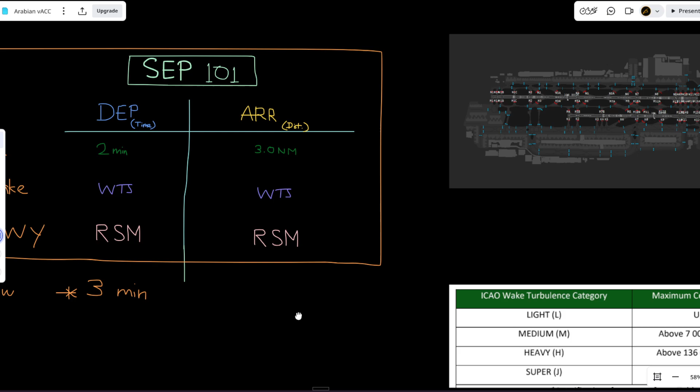And as I said, this applies universally across all airports in the Arabian VACC, with the exception of this little thing right here, which is unique to Dubai. But hey, speaking of Dubai, that's kind of a segue here, because as it turns out, Dubai is special, very special, and what we see here is actually not what we apply into Dubai, because what are we trying to do at Dubai? So I'm just going to get rid of this flow separation thing, by the way.

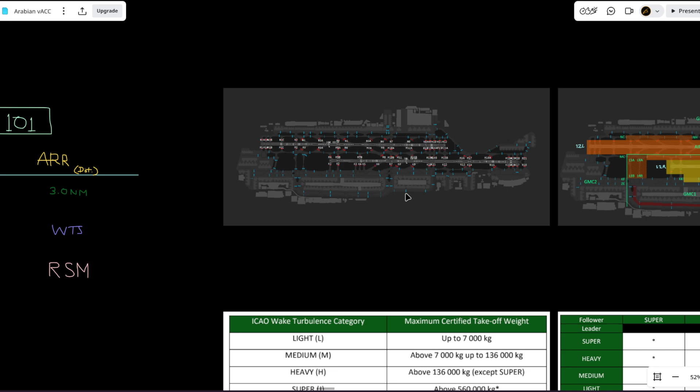Dubai is a very busy and populous airport, very populated. Given how much activity it sees and how little room we have to maneuver, we only have one runway for departures and one for arrivals, and even so, they're both pretty closely spaced together, as you can see.

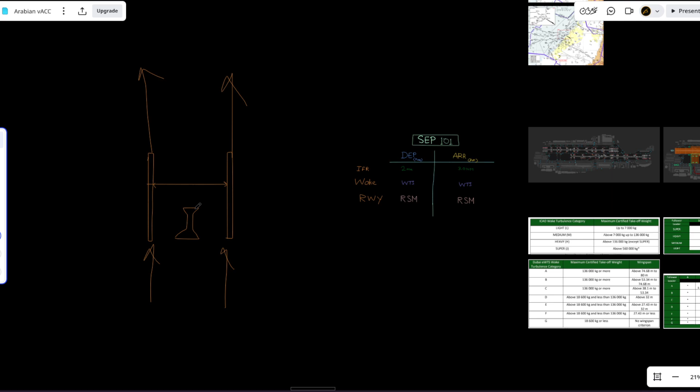Unlike airports such as, if you think about over on the west, we've got Qatar, Doha, with two huge runways and a massive terminal. Don't question my drawing skills here, but let's say this is a terminal, just pretend. And these runways are really spaced out by quite a bit, so you can have simultaneous departures, simultaneous arrivals, just to keep it simple. In reality, obviously you have restrictions on what you're allowed to do with simultaneous operations, or the way you mix operations, but a big airport like that, you have a lot of room to play with.

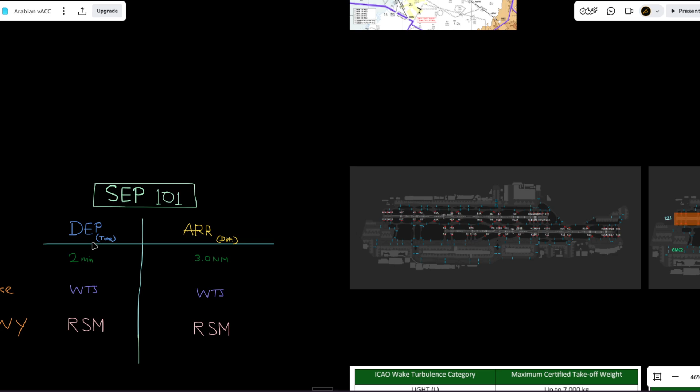Dubai, though, not so much. Which, if you pair this with the fact that we have to accommodate a very large volume of traffic, we have to be as efficient as we can. We have to make as much use of what we have. We have to maximize what we have. And that also means

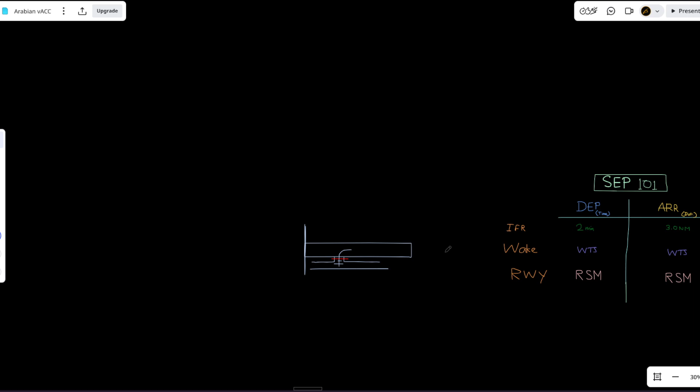putting a question mark on all of this. Do we really need to apply, for example, runway separation minimums? I talked about this, right? So if I just bring this back - do we really need to wait until they pass the stop bar, for example? Do we really need to wait until they're completely clear of the opposite threshold? Can't we give landing clearances or takeoff clearances any sooner based off of some criteria that we could prescribe ourselves?

What about wake? We get it, generally speaking, a bigger plane equates to just having a maximum, so rather go at it the other way - if you want to carry more passengers, you want a bigger plane that can have a higher takeoff weight,

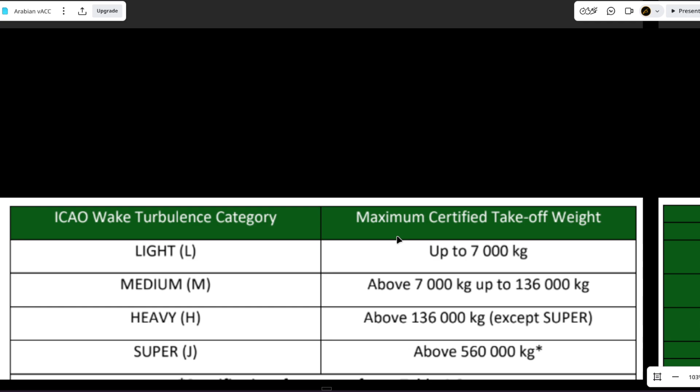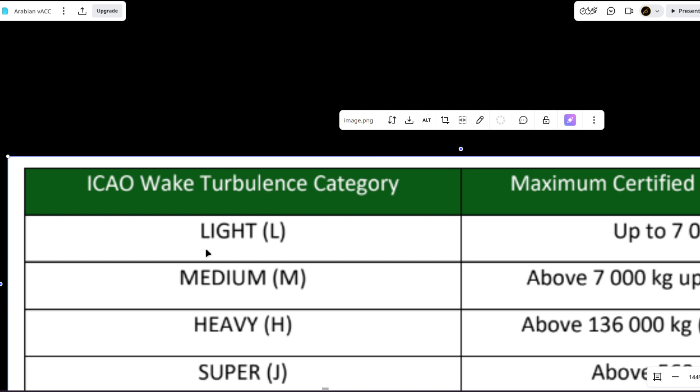and that makes the overall plane bigger, so to speak. So you're thinking in terms of weight, but is weight the only real way to measure an airplane? Because I haven't even mentioned size. I mean, yeah, we have the names, but it's really not a size - it's just a classification which is based in and of itself off of weight. We're not really measuring the size of aircraft. Would that probably be a factor?

In today's video, we're going to tackle all of those questions. Let's start with wake. So if we go back to what we said there,

generally speaking, the bigger planes produce bigger wake turbulence. But at the end of the day, it's a phenomenon that depends upon your wings. You can imagine if you had stubby little wings, teeny tiny little wings, well then your wake turbulence is actually not going to be as much compared to an aircraft that, for whatever reason, is not that much heavier but has a much bigger wing. You have so much more air that it interacts with, and therefore the effect of the wake turbulence is actually greater, as you can see.

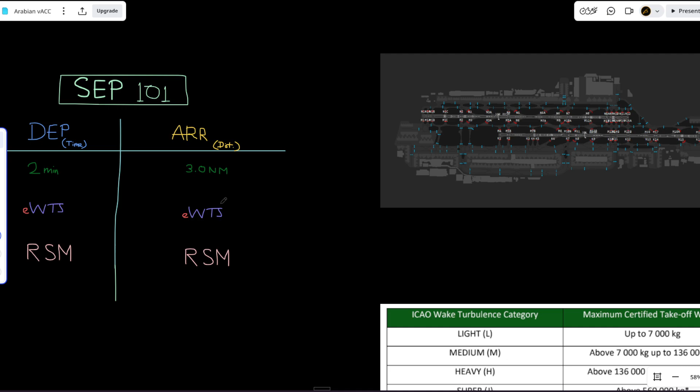So, in other words, can we throw in wingspans to the mix in addition to how much they weigh? Well, that's exactly what Dubai has done with what's now called EWTS, Enhanced Wake Turbulence Separation. So things get kind of interesting here. As I mentioned, why stick to just the weights when you can think about the wingspans?

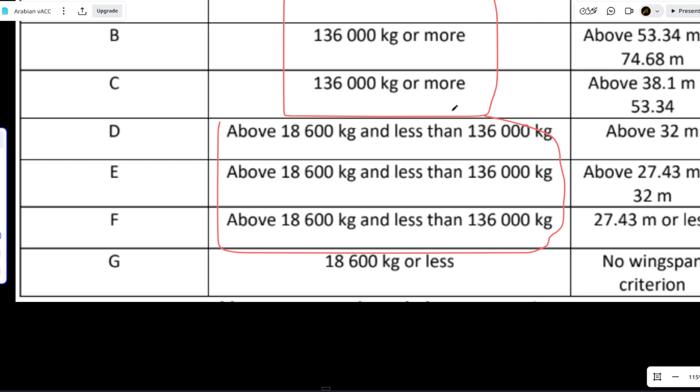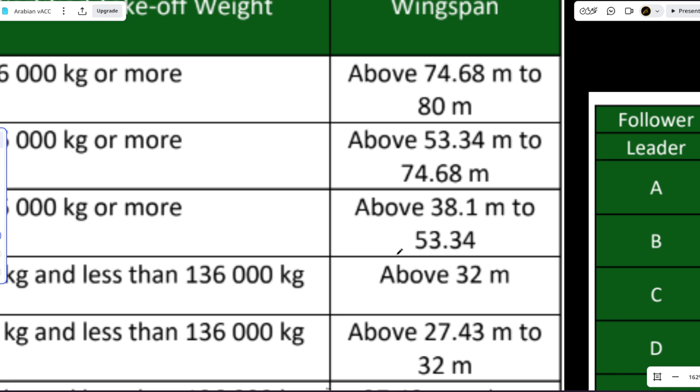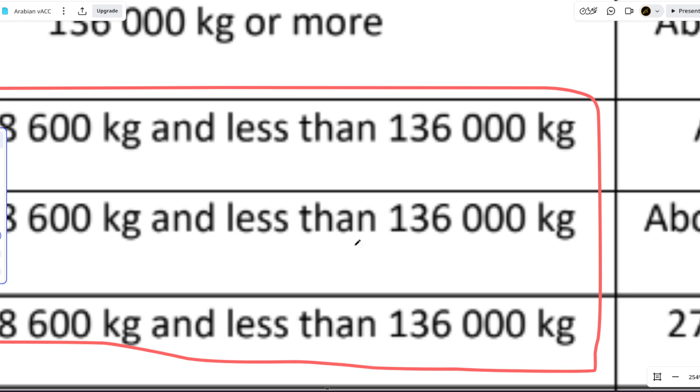So as you can see, the same weights here, the same weights here, and the same weights here. But if you look over on this side, you have much more condensed, spread wingspan criteria. In fact, you can actually have aircraft within the same weight classification - let's go with this one here - that would have originally been one category, as you can see, but now because of their wingspans, they could be different categories.

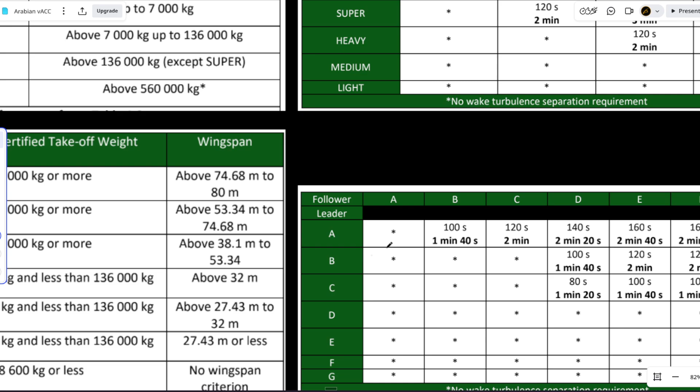Isn't that fascinating? So with this, we get a bigger spread. Now the most amount of separation that we apply, light following a super, it's 3 minutes. It's still 3 minutes here.

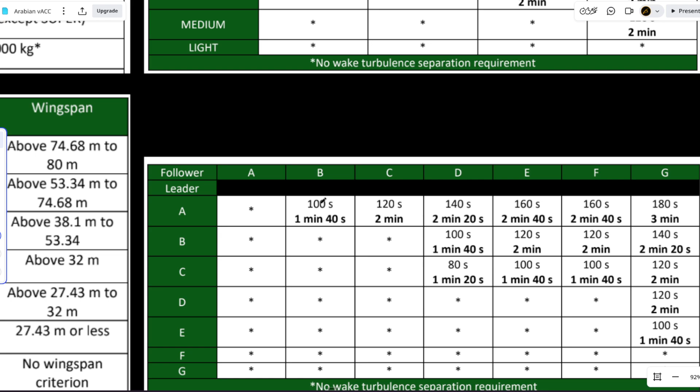But now if you spread it out with all this extra classification that we've got, it's based off of a turbulence category alphabet. It goes from Alpha all the way to Golf. Dubai Enhanced Wake Turbulence Separation, Wake Turbulence Category: Alpha, Bravo, Charlie, Delta, Echo, Foxtrot, Golf, etc.

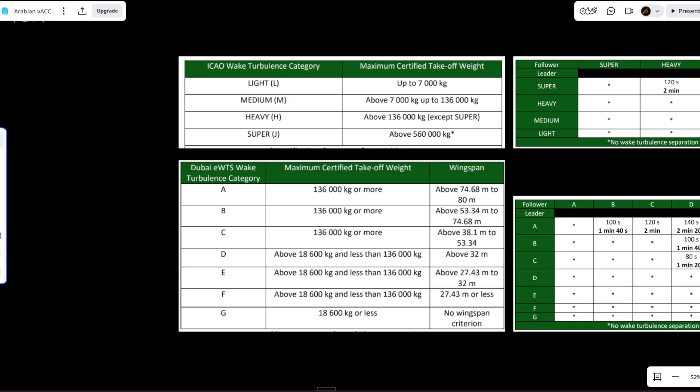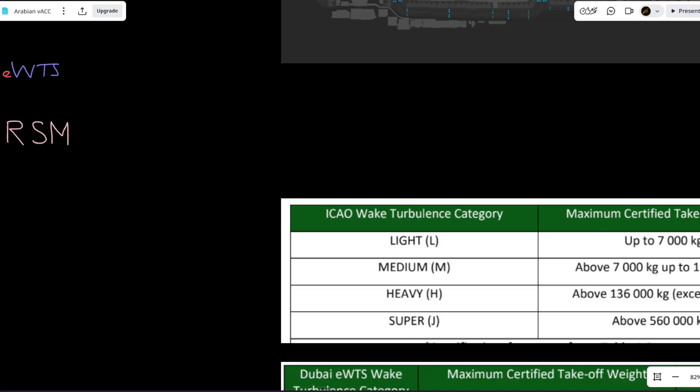For the record, you can see examples of such aircraft over on the library. As you can see, a 737 is a class Delta, a 777 is a class Bravo even, an A380 is a class Alpha, an A320 is a class Delta. On the other hand, your controller client, your tag, and your departure list will also show you the code or the category, so you don't have to memorize which aircraft is what per se, but it's good to know.

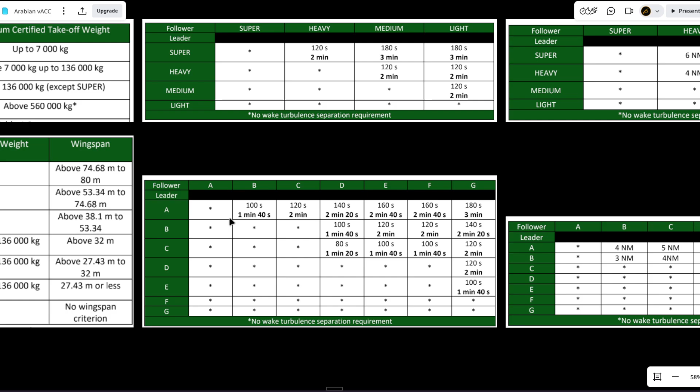And now with that, you have all these extra timings and distances. So what is the benefit, really? If we take into account wingspans, and merge that to the weights that we have, but also spread out the timings and the distances, what does this allow us to do? So let's think about that for a second.

So here's your story for today. A Boeing 767. Actually, no, let's go with someone else. Let's go with an Airbus A310. This little A310 right here has departed from a runway.

And on that runway right now is a 737. Let's make that a little bit more of an obvious color. There we go. And just to show the size of it, I'll reduce the size, so to speak. This is now a 737. Now, if we apply ICAO turbulence separation minimas, Boeing 737-800.

These are the ICAO codes, by the way, in case you don't know. So if he's on the runway, when do we separate? Or rather, when do we deduce that it's a good time to take off? Well, as per ICAO, if you put in the categories, let me just change this color here. Let's make this a little bit darker. There we go.

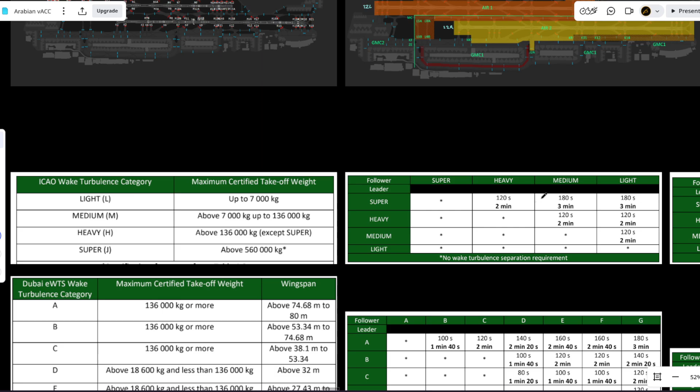A310, so as per the ICAO category, that is going to be a heavy. And this is a medium. So we go back here. It's a medium following a heavy. It is 2 minutes of separation. So we're applying 2 minutes.

All right, 2 minutes of separation, which is a lot for an A310. Really? I mean, have you seen an A310? Sure, it is a wide body, yes, but it's not that big of a plane. It's got two aisles, but it's really not that big of a plane. It's got stubby little wings. You're telling me that this has the same category as a 747-400? Which is obviously bigger?

Well, as it turns out, an A310 in this classification is only a class Charlie, as you can see. An A310 is class Charlie. So let's do it in a different color here, in a box, just to show the difference. Charlie. And the 737 is a class Delta.

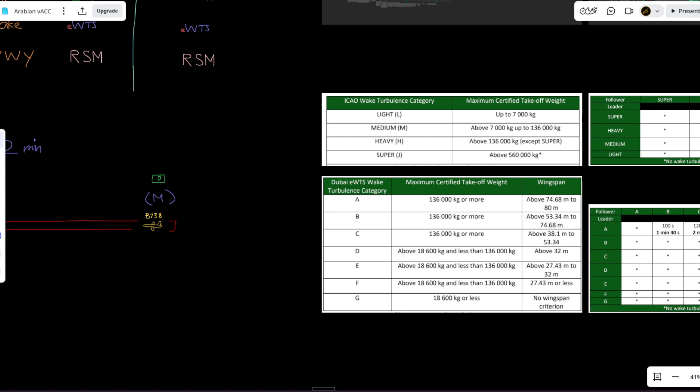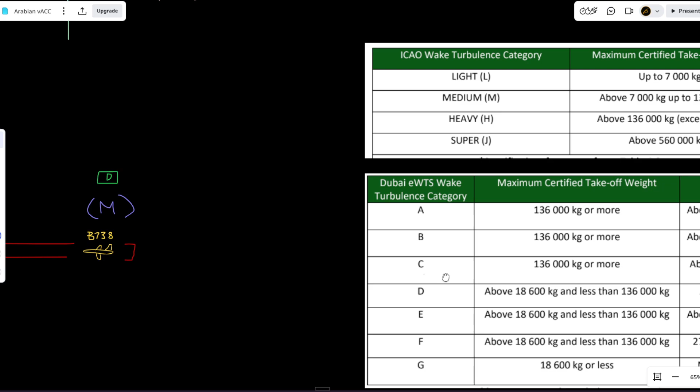This is just a different chart, really, but it's the same information, the exact same thing. You can see it in the library. But you have your follower, who is now a Delta, following a Charlie. Well, look at that, you only need to apply 1 minute and 20 seconds of separation. Holy moly, you're saving a lot of time doing this. Right? Isn't that something?